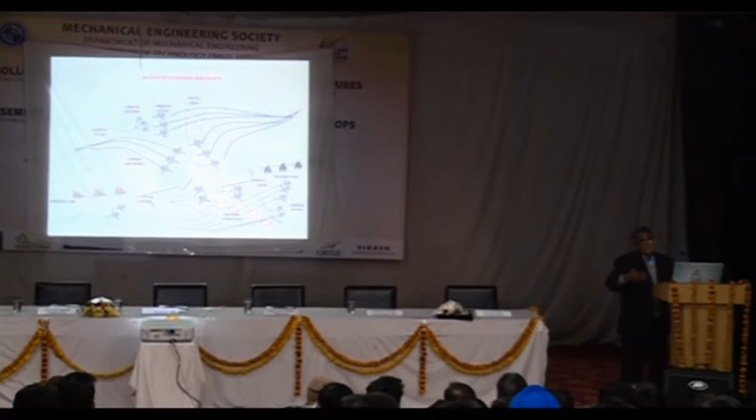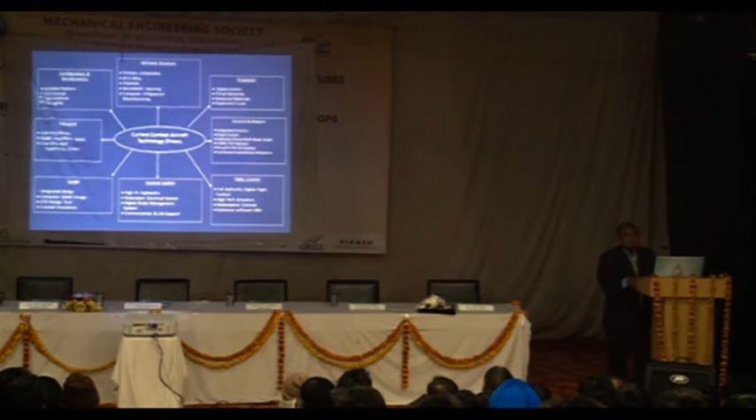It is meant for some 3 roles, not for deep penetration, but to support the army, air defense, air superiority, and what we call interdiction. It will have a range of about 250 to 300 kilometers, but very good combat capability. These are the roles, these are the weapons it is supposed to carry, and these are the kinds of technologies it should have. Some of these are top-end technologies, and we didn't have any of them.

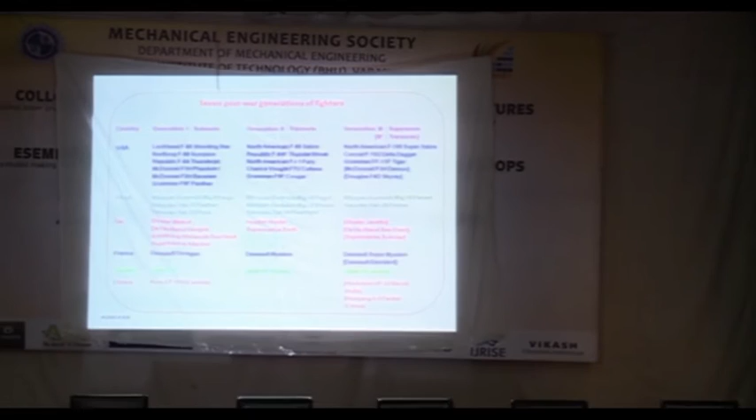That was the challenge. After the Second World War, there were generations of fighters. Generation 1 is subsonic, below the speed of sound. Generation 2 is transonic, generation 3 is supersonic. In generation 1 you see the USA, USSR (now Russia), and UK developing many aircraft. In the second generation, many things were done. In the third generation, India developed one aircraft called HF-24 Marut, but it was headed by a German design team, not an Indian team, though it was done in India. After that came bisonic, then multi-role aircraft, then next generation fighters, that is what we required. We didn't have any program in the 4th and 5th generation. Then it came to the 6th, then the LCA came.

In the technology business, if you have some strength, you have to continue research and development to keep that leadership position. If you don't, you will slip. You have to run just to stay where you are. And if you are not even walking, imagine what happens. That's what happened to India — we were not even walking, we were crawling, not even that.

The situation was: no fighter program, non-existent computer facilities, no significant technology development, and shrinking research and developmental activities. So the challenge was to develop innovation. I want to talk about this because today there was a lecture on innovation.

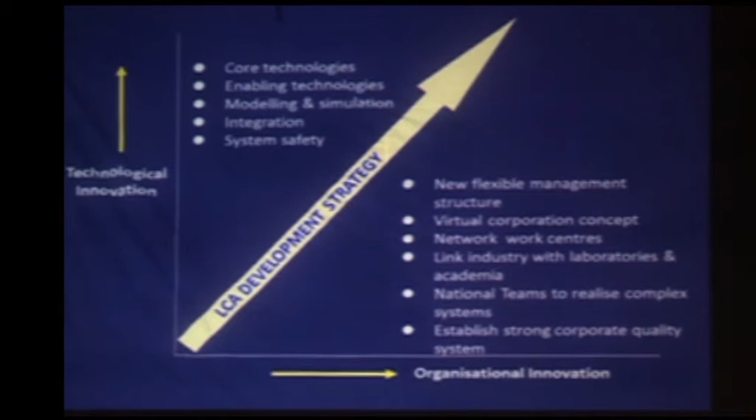Our aim was to develop a world-class aircraft. We developed an aircraft called the tailless delta with compound sweep — the only aircraft in the world of this kind, nothing else like it. It's a highly unstable aircraft. A fighter has to be agile, and to be agile it must be unstable. But designing such an aircraft is tougher.

We have four computers in the aircraft. If one fails, the other three can take over. If two fail, two remain; if three fail, still one will be there. This is called a quadruplex digital system.

We have an all-composite airframe, very light — in fact 90% of this aircraft's surface is composites. It has a glass cockpit, all avionics, a microprocessor-based utility system, health monitoring, fixed intakes, very low wing loading, and a single engine.

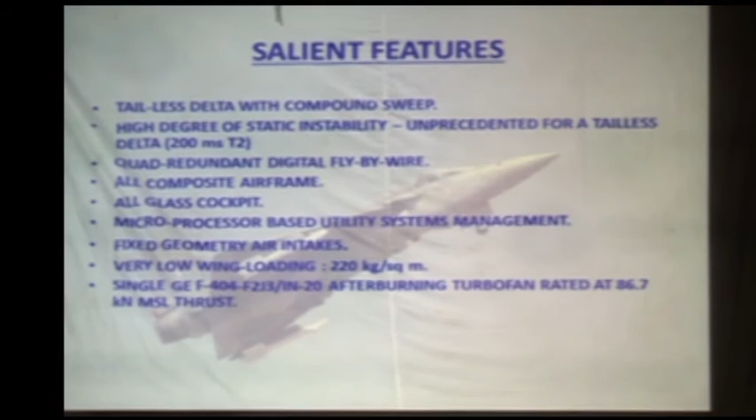We still use an American engine — I hope someday we will replace it with an indigenous one. All the other technologies I've listed here have been developed within the country. I am showing this here.

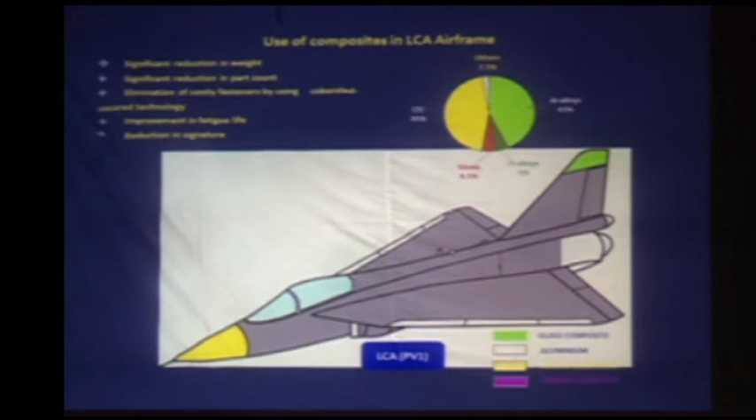You will see the gray — all of that is made of advanced composites: 90% by surface area and 45% by weight is composite material. When we started the project we had zero such capability, but by the time we finished, this aircraft had the highest percentage of composites anywhere in the world.

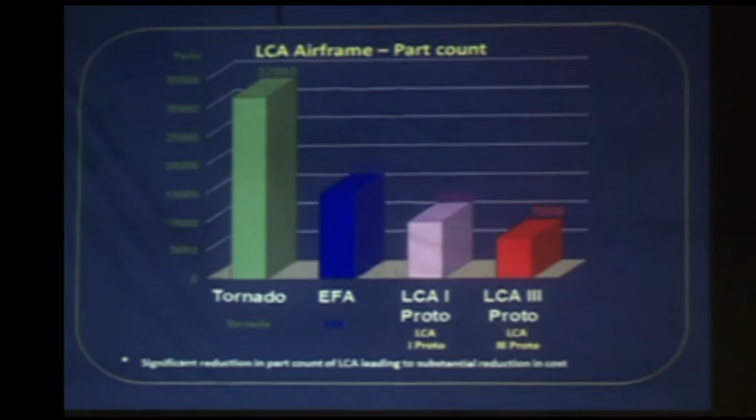Just to give you an idea, earlier aircraft had 32,000 parts. The LCA has 7,000 parts. As good engineers you'll agree, fewer parts mean fewer failures. If you have more people, you have more problems; if you have fewer people, fewer problems. So there are fewer parts here — less than 25%.

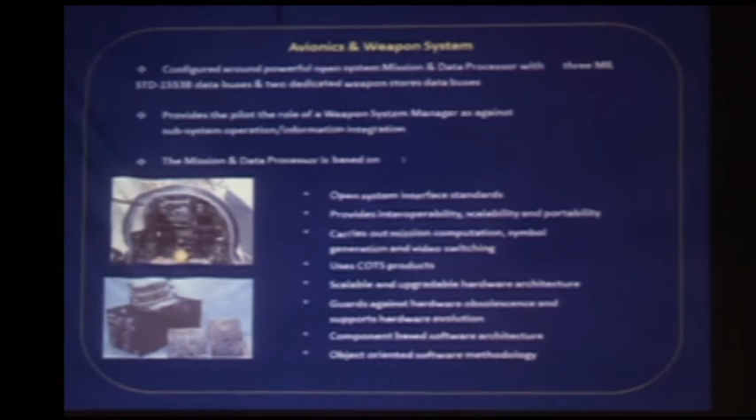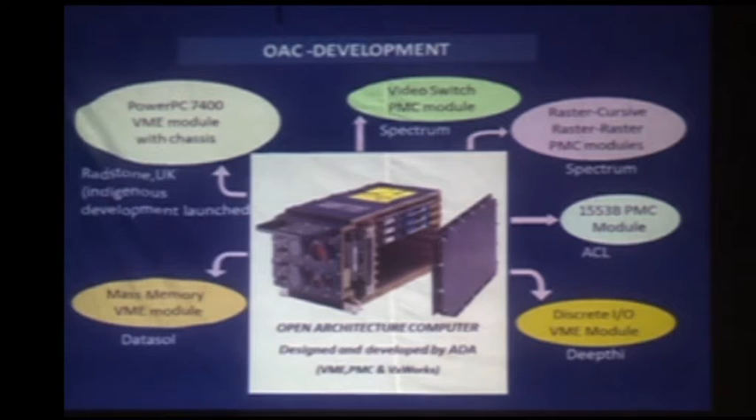We had a very advanced fly-by-wire system — you can see that on the website — and a glass cockpit. We have an onboard computer system; since electronics change so fast, your architecture should allow you to change components without changing the whole architecture or other systems. That's what we achieved.

These are the avionics and weapon systems. Today, except for two items, everything else is made indigenously in the country. The other two may also be ready in the next couple of years. This is the glass cockpit — there are no dial instruments, nothing like that.

Everything is programmable, and that is what gives the flexibility to the pilot.

This is the other aircraft. This is what you call a helmet-mounted display. The pilot need not have to see outside. He has the displays right there, projecting to his eyes. Through that, he can see what is happening. He can see ahead of him, and he can also see his own weapons when he has to fire. This is called the helmet-mounted display.

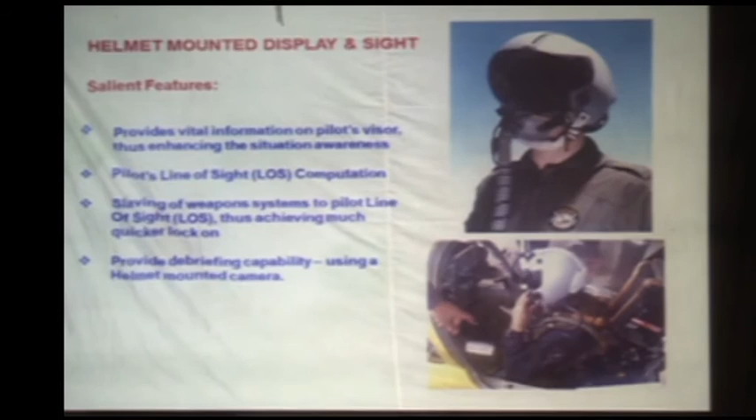These are the kind of weapons that are being used on this aircraft. This is the multimode radar which we are using, which is the important element. These are the kind of weapon systems we are working on. It has many weapons, I'll show you a video.

But one of the key elements here is, in addition to the hardware I talked about, you need an extremely safety critical software. This aircraft, if it goes out of control for more than 200 milliseconds, if the computer's software fails for more than 200 milliseconds, the aircraft will go out of control. So the maximum you have is 200 milliseconds, and within that you have to make all changes. The software just cannot fail to do it. I thought one of the great things we have learned is how to develop safety critical and mission critical software. We have built in a tremendous amount of reliability. In the last 15 years, thousands of hours of flight, we have never seen a single failure. It shows it is possible to design a highly reliable aircraft.

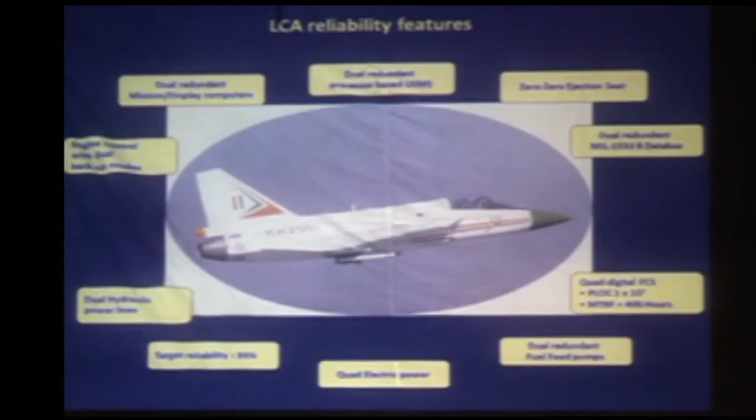Now, the question you will ask is how indigenous is that?

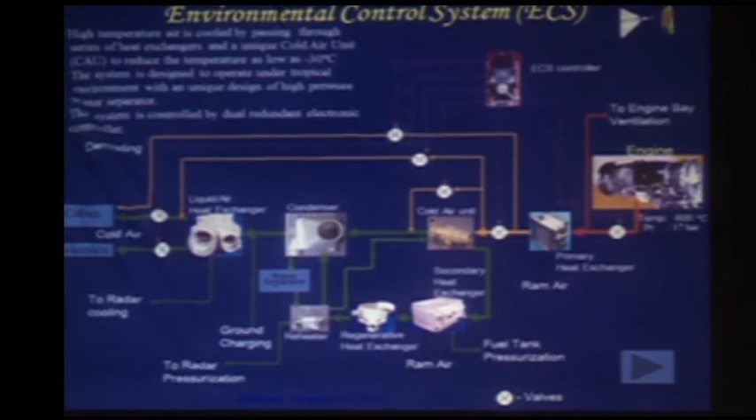This is the environment control system, your air conditioning system, what you call it. All the critical elements here have been done indigenously. All the heat exchangers, the primary, secondary, cold air unit, pumps, valves, all of them have been done within the country. They have been done by research labs, R&D institutions, academic institutions like IIT Kharagpur, and our friends from a very unknown place called BHPV in Visakhapatnam. They manufacture all these heat exchangers and develop them. And they work very closely with the academic institutions and a lab called DMRL.

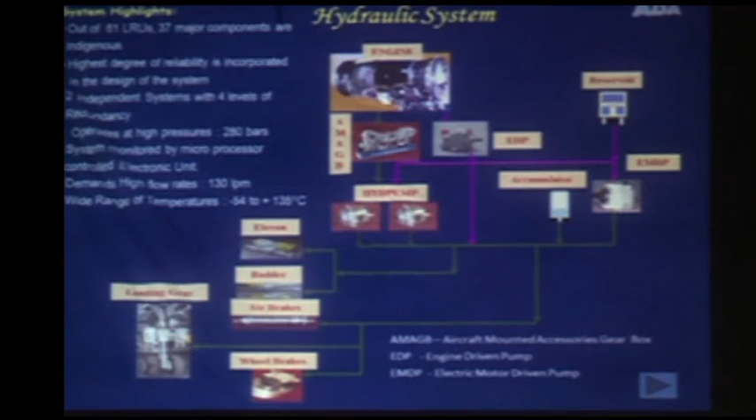These are the hydraulic systems. You will see some of the most critical things have been developed in the country. This is the secondary power system - all done within the country. And this is what you call the brake management system. You will see here, all of them have been done. For example, you use carbon brakes.

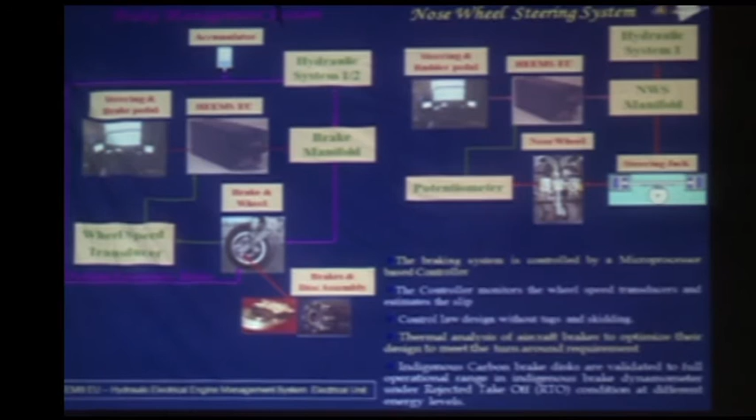The carbon technology we are using here originates from the carbon technology they developed for the Agni missile. They have a cover which withstands temperatures of more than 2000 degrees centigrade. When you apply brakes, the temperature will go that high. So that is how this was developed. When they developed the technology, they never thought of aircraft - they were only thinking about a missile. But you see, that has helped to develop this. So once you develop something, it helps you in other things. That is what happens.

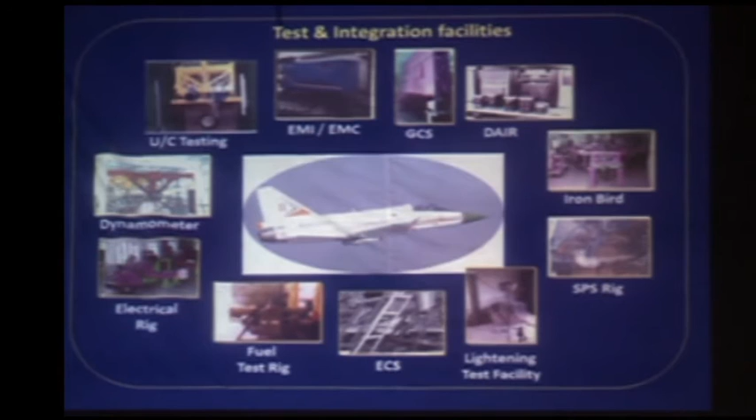We have to build an enormous amount of test facilities - electromagnetic interference facilities, ground checkout systems. Let me show you some of them. This is the lightning test facility. Metals are very good conductors, so when lightning strikes, it dissipates. But composites are not good conductors, so you have to design such that when there is lightning, it passes through without damaging the equipment inside. That is an important technology. Not only do you have to design it, but you have to test and prove that it actually works.

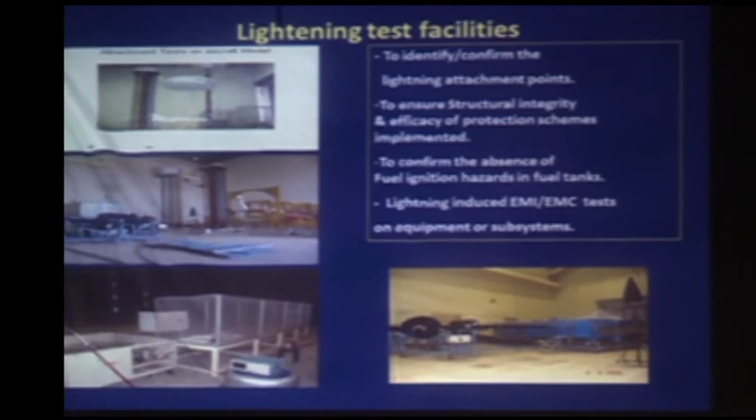There is one professor, Professor Nagabhushan from the Indian Institute of Science, who built the whole facility. He created the whole thing - high voltage, high current - whereby he simulates actual lightning, and we put the whole aircraft there and make it operate in the presence of lightning to check that it works. This facility, when it got ready and started being used, became the best facility in the whole world. So you could see that in a place like India, you could do something which is the best in the world.

The second very important thing for all of you - I hope enough importance is being given to this - is modeling and simulation.

Because when this aircraft was getting ready, the people who designed it are new, the people who inspected it are new, the people who certified it are new, and the pilot who is going to fly it is also new. Nobody has ever got any experience. How do you prove that the aircraft is safe to fly without flying?

That is where modeling and simulation comes in. You model them very accurately, simulate the whole aircraft flying. In fact, the pilot had flown something like 3,000 hours on a simulator before he actually flew it. When he went and came back, the question asked to him was, how did you feel? He said, I felt as if I am flying in the simulator. That means the simulation was so accurately done, he didn't feel anything different.

So modeling and simulation, in the new generation, is a key technology today. I hope you will all learn this, whether it's hydraulics, mechanical engineering, electrical engineering, any engineering - modeling and simulation is the backbone. If I'm developing a pump, the first thing I do is develop a model for the pump. If I'm developing a valve, I must know how the valve is functioning in the computer. I will model it, I'll check it, I will introduce failures and check it. I think that is what we have to do. It's very, very important we do that.

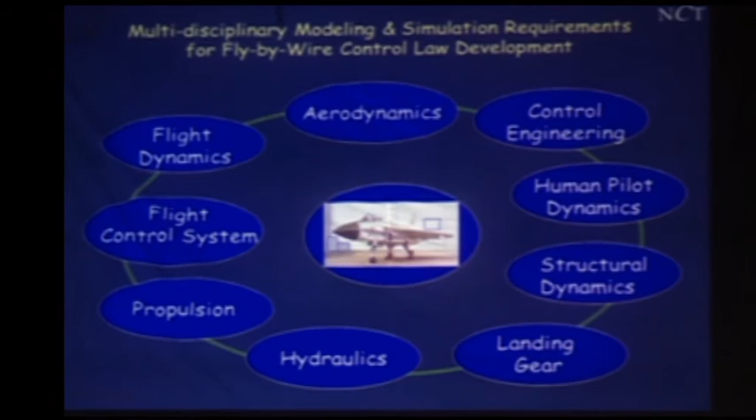So we did enormous amount of modeling and simulation, and thanks to that, we could do something good. We used all tools to do this.

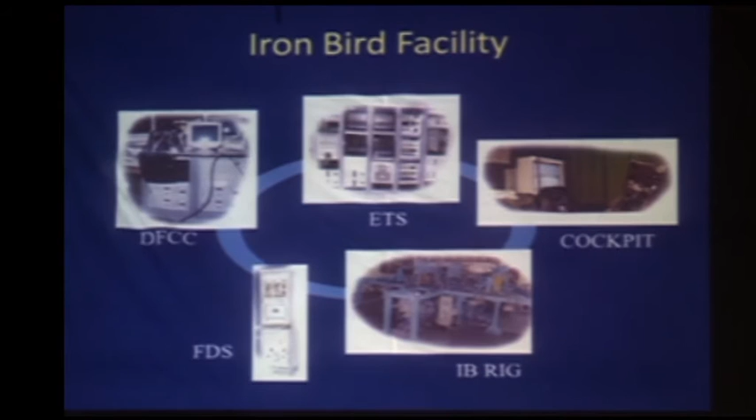Time is going up. We use a facility called Iron Bird. The whole aircraft is as if anchored to the ground, and we fly the whole aircraft on the ground and see how it performs. We introduce faults and check whether, in spite of the fault, the aircraft is safe to fly or not. So that is what we call Iron Bird.

And we do a structural coupling test - we test it like that, hanging. And we have a dynamic avionics weaponry facility where we simulate weapons and fly the aircraft with weapons to see whether it is working or not.

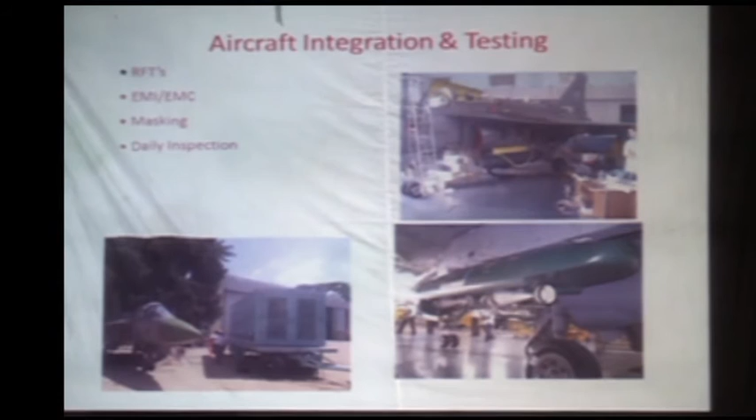We do what you call integration and testing facilities. One of the most difficult things is when you flight test it, you are going into unknown regions, and how do you ensure that the system works well? For all that, we also need a lot of enabling technologies, right from CAD/CAM and other things. Computational fluid dynamics is an extremely important technology - I'm sure it is in mechanical, aeronautics, everywhere.

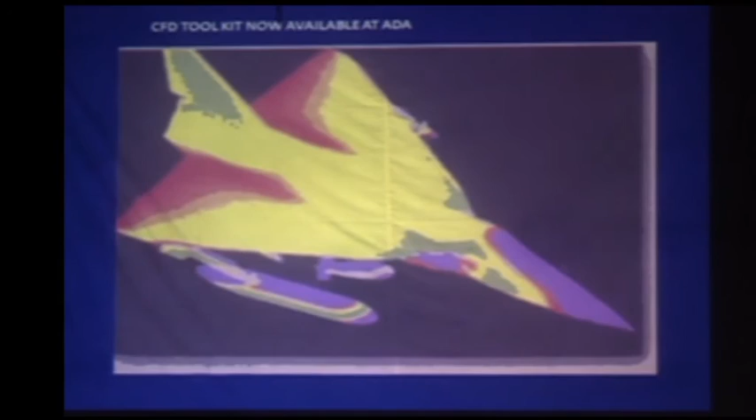So this is what we developed. When we started, we had only drawing boards. Today we have a total digital system - even the drawing board is not even known to present engineers. So you can see that change.

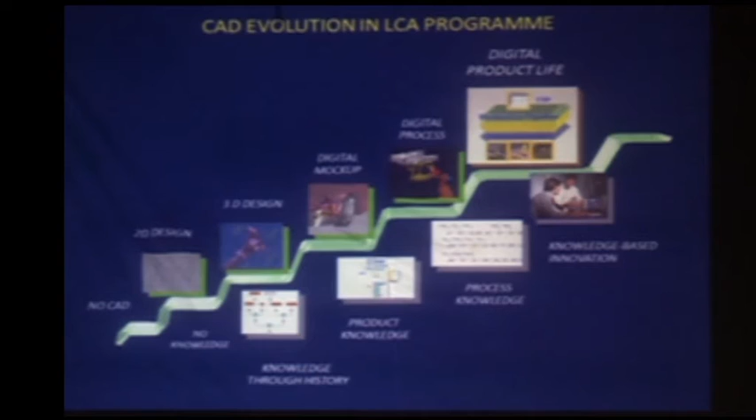We also developed a software called automatic layout system. This software covers everything from conceptual design to quality control, manufacturing, design. It's an interesting story because we developed this whole software to develop the wings of the LCA, light combat aircraft.

But while we were doing that, one professor from University of Warwick came and had a look at it. He said, it's an extraordinarily good software, why don't you sell it? I said, we will be happy to sell, but we don't know whom to sell to. He said, no, the people who really want this kind of software are the industries in Europe - Airbus, Boeing, and all those people. I said, let us see how we can do it.

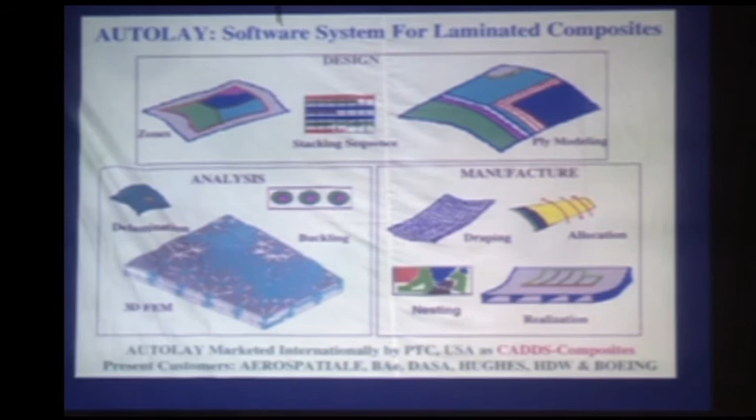Then, what I want to tell you is, they did a benchmarking of the software, composite software, across the whole world, and they found our software is the best in the world. And they bought it from us.

Around that time, there was a Business Week of New York - you have a Business Week here also. They were looking at which are the innovation centers of the whole world, and they identified 5 such centers. I'm happy to tell you, one of the 5 centers is this team in India. They put it at the top of their front page and said real innovation is occurring here. From zero - I think that's what happened.

And today, if you have a chance to go in an A380, an 800-seater passenger aircraft, or A350, you will be traveling in an aircraft whose composite parts have been designed using our software. So be happy, don't worry. That's what happens.

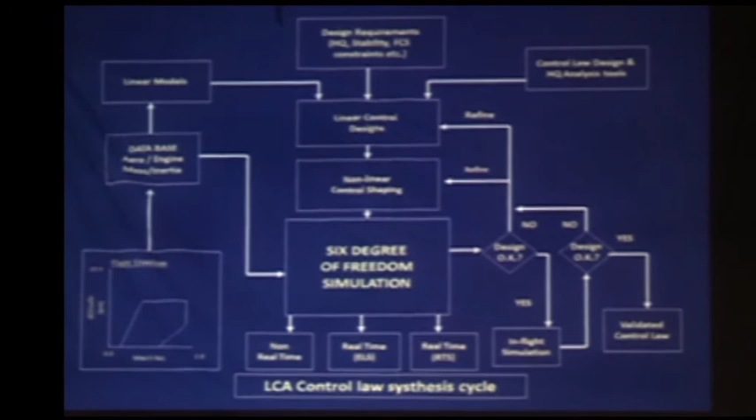And as I said, simulation is a very, very critical activity. We spent a lot of effort on that. What I mentioned to you in the beginning - we had the tremendous participation of industries, R&D labs, academia - and I tell you, this is what helped us to innovate.

See, I want to give one thing. Industry fellows will think in one particular way, R&D fellows will think in a different way, academic fellows think a totally different way. But when you want to innovate, you do not want everybody to think the same way. You want people who think differently. If everybody thinks the same way, how will change occur? So sometimes it's good to have people who think differently. Suppose you don't have people who think differently, you bring in a fellow who thinks differently.

And he will question you, then things will happen. And that is exactly what happened to us. It was very open, we had people of different backgrounds, different thinking and all, but one single common goal - we will make this aircraft in India. That is the company, the goal should be common. If the goals are also different, then it becomes a mess. But if the common goal is there, different thinking should be welcomed.

In fact, my boss, Kalam, used to, whenever there was a review, if everybody is agreeing, he would get worried. This means two things: one is, boss said so we agree. Second thing, nobody read anything, so how can they disagree?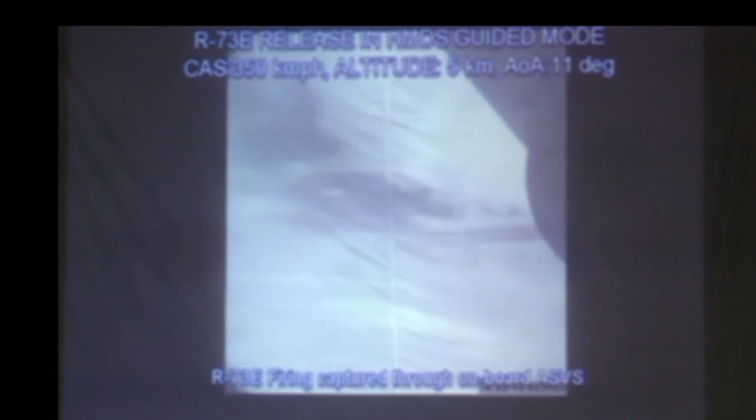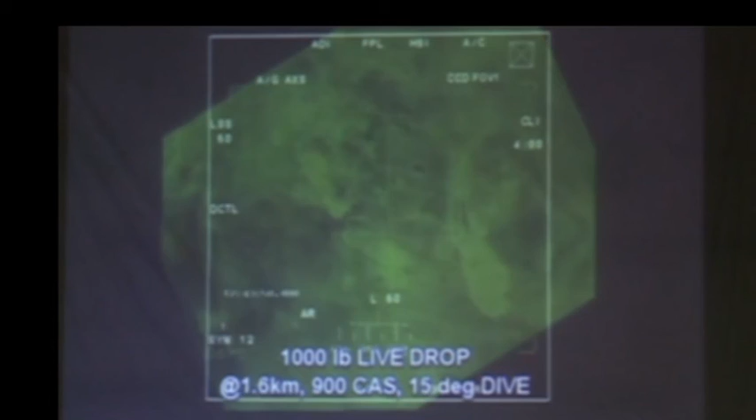You can see the helmet-mounted display system worn by the pilot. The missile then goes on to laser guided bomb release. The bomb drops from the aircraft from an altitude of 5 kilometers and scores a direct hit. Live 1,000-pound bomb drop - the bomb, released from an altitude of 1.6 kilometers in a shallow dive, hits the target and explodes. The aircraft crosswind operation trials at Jamnagar.

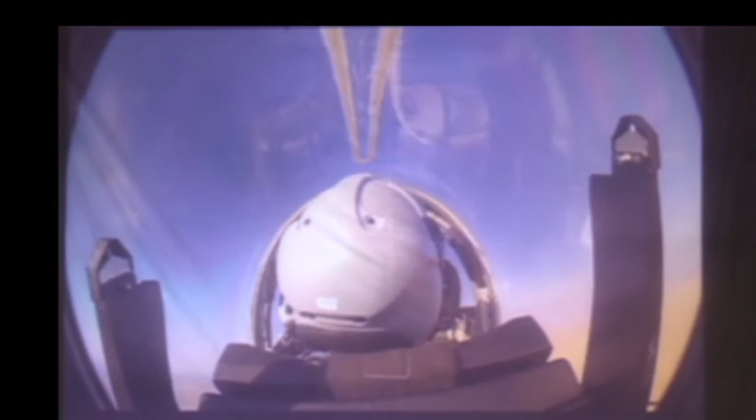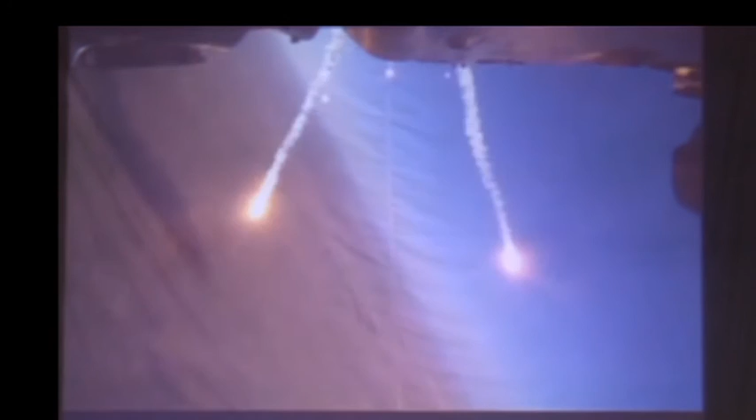The light combat aircraft participated creditably in IAF exercise Iron Fist, demonstrating swing role capability. Swing role involves firing a laser-guided bomb on a ground target, followed immediately by firing the R-73 air-to-air missile on an airborne target. The main and standby aircraft line up and take off on time, as observed from an onboard camera. Over range, the main aircraft fires the laser-guided bomb first, achieving correct time over target. Demonstrating swing role, the aircraft then fires the air-to-air missile, as observed from the cockpit, with a small circle depicting the hit of the target. The aircraft releases flares successfully as it exits the range. Mission accomplished, the 2 aircraft rejoin.

Here, the standby aircraft, as seen from the lead, performs a successful emergency jettison of stores comprising drop tanks and 1,000-pound bombs, completed at Jamnagar. The aircraft flies at 2 kilometers at a speed of 0.7 Mach. The drop tanks fall first, dropping clean off the aircraft, followed by the bombs, achieving a safe separation. Jettison of stores as observed from an onboard camera.

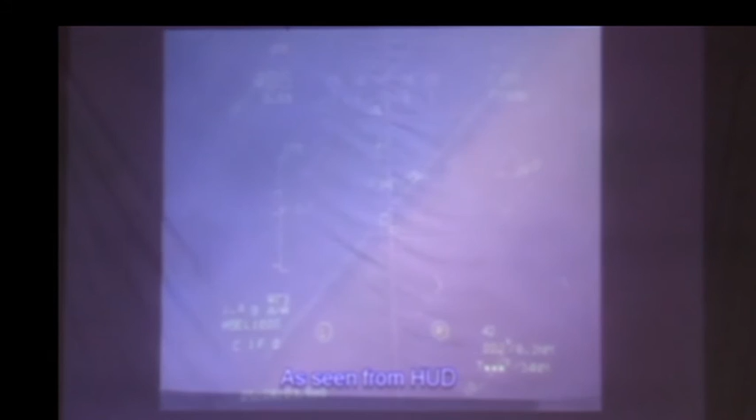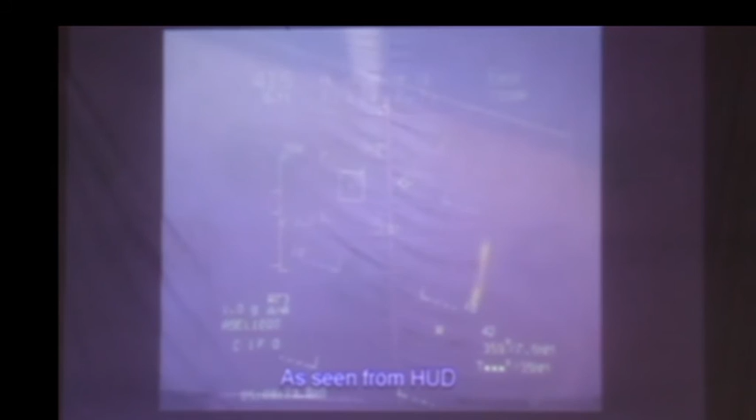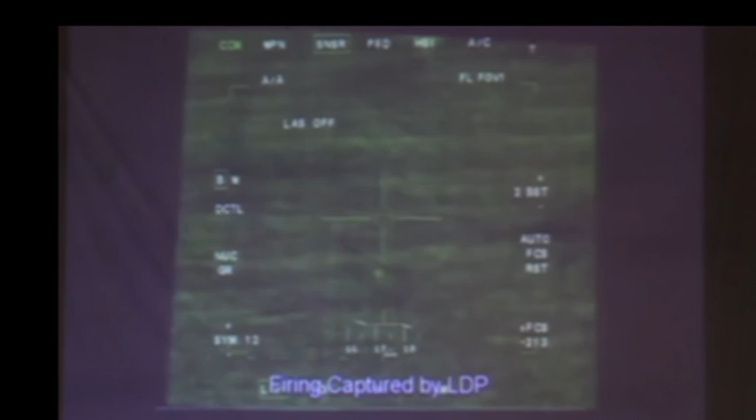This is how a pilot sees from his cockpit. He is seeing the external world. You can see exactly how it is when he drops a bomb, how it functions. You can see that it hits the target accurately.